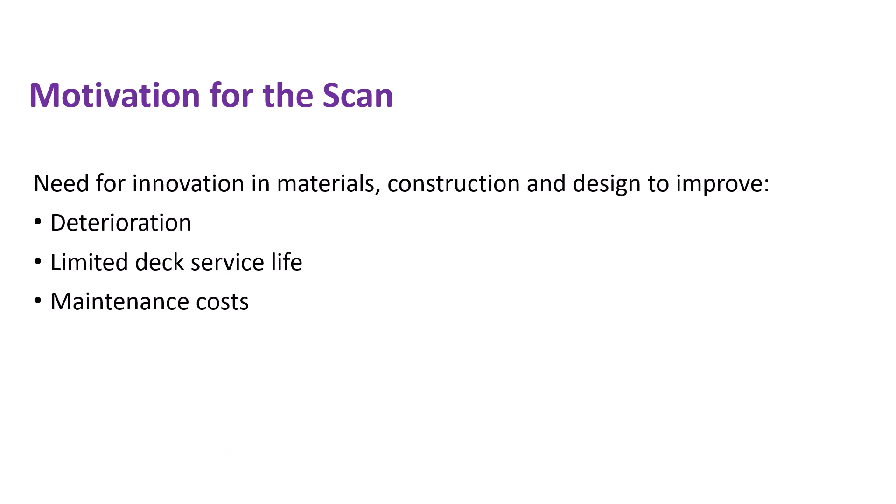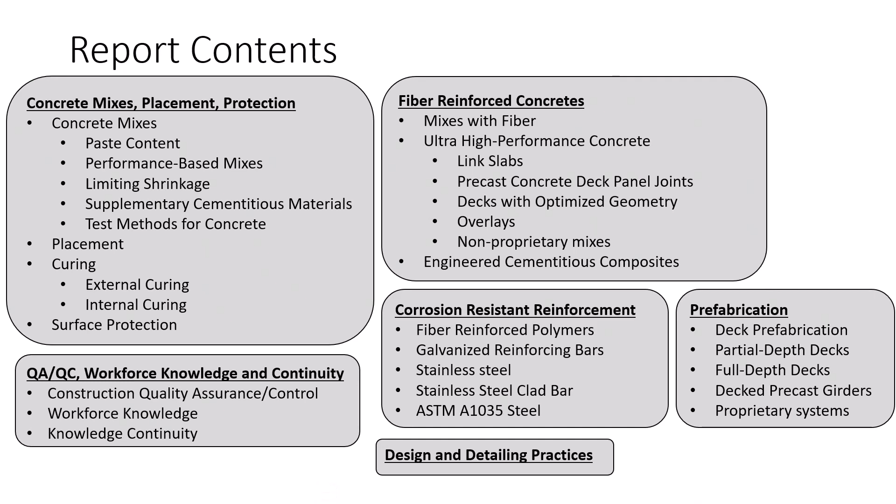This is the contents of what will be included in the report. They discuss a variety of things that range from different concrete mixes, placement, construction practices, to fiber reinforced concrete, to corrosion resistance reinforcement, prefabrication, QA, QC, and design. The report should be available very soon, and there will be lots more information in it, but the following will be just an overview of what was discussed and found out.

So we'll start with concrete mixes, placement, and protection. The scan was focused on innovation, but this part is more about best practices and modern concrete mixes. Not too much innovation in terms of materials, but what works best for agencies that participated in the scan.

So first thing that was discussed was what makes concrete mix crack less. It was discovered that for those modern mixes that have fewer cracks, the paste content was limited. If you limit that paste content, which would be our water and cement content, it does seem to result in fewer cracks, which does mean moderate strength, but the consensus was that we don't really need terribly high strength for concrete decks.

Anyways, there were some concerns though from some DOTs that you don't always get what you specify, so it's good to shoot a little higher just in case there are some material quality issues. So some states, because of that, still want to specify higher strength, but others are comfortable with a moderate strength, and they did experience less cracking with that lower cementitious material content. Here are three examples from the scan with their cementitious material content.

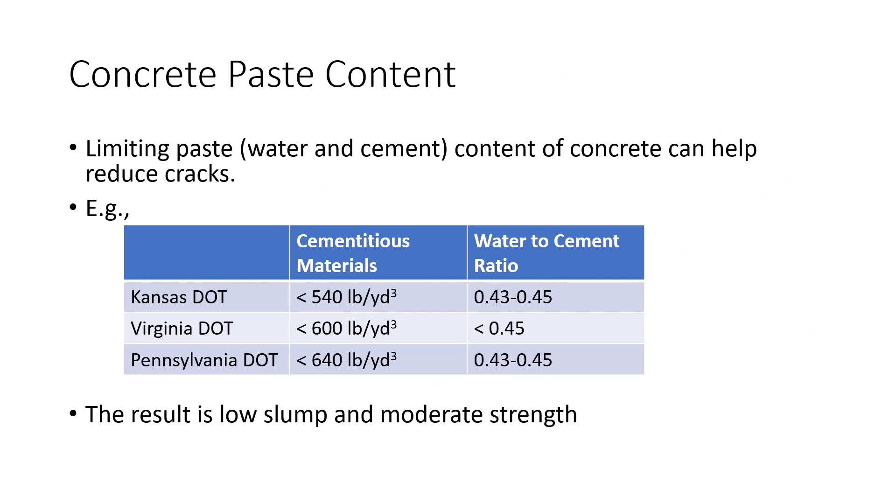The second thing discussed for concrete mix is that limiting concrete shrinkage strain seems to have a big impact. There's really a common performance requirement seen when agencies have these high performance mixes. This can be achieved either with the mix or with shrinkage reducing admixtures. California is a big fan of this, and they reported really great benefits from adding shrinkage reducing admixtures without really seeing an increase in cost all that much.

So from a few participating states, their shrinkage strain limit at 28 days is right around 300 to 350 microstrain. How they achieve that is kind of up to them. For example, Virginia DOT uses shrinkage reducing admixtures, but it's an optional thing. So if you can achieve that shrinkage strain without admixtures, then that's okay too.

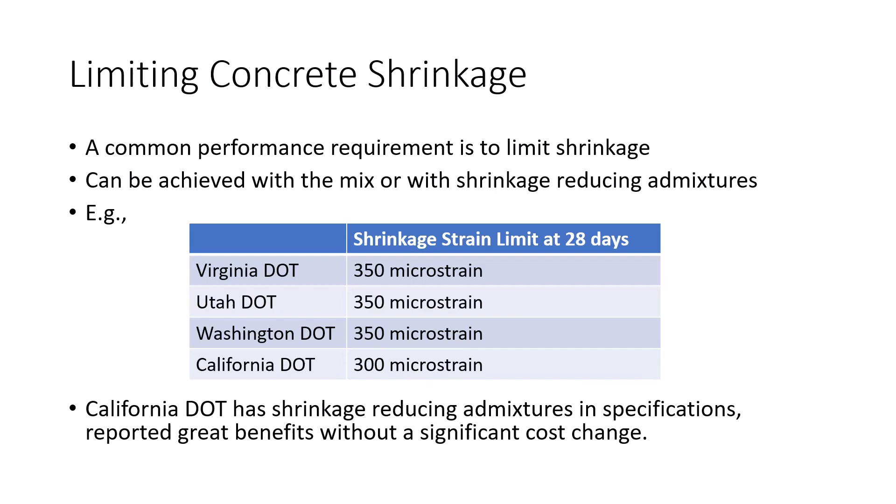The scan also discussed placement and finishing. It's not really innovation, but most DOTs agreed that you get the best quality concrete when you minimize finishing.

A big thing is to start external curing or wet curing right away. Some DOTs even discussed bringing work bridges to the site so workers can start curing right away, avoiding tining and instead saw-grooving the hardened concrete so external curing can start sooner. Some DOTs mentioned monetary penalties per hour of delay in external curing to encourage contractors to start curing right away, and using misting if you can to help control evaporation of the concrete.

There was also discussion about specifying temperature limits for plastic concrete, trying to pour when ambient temperature fluctuations are small, or when the concrete and contact surface temperatures - meaning the girders - are close together. If the temperature of the concrete and the girders were very different at the time of the pour, it seemed to cause more trouble. For the same reason, avoiding night pours. Controlling that temperature as much as you can seemed to result in better quality concrete.

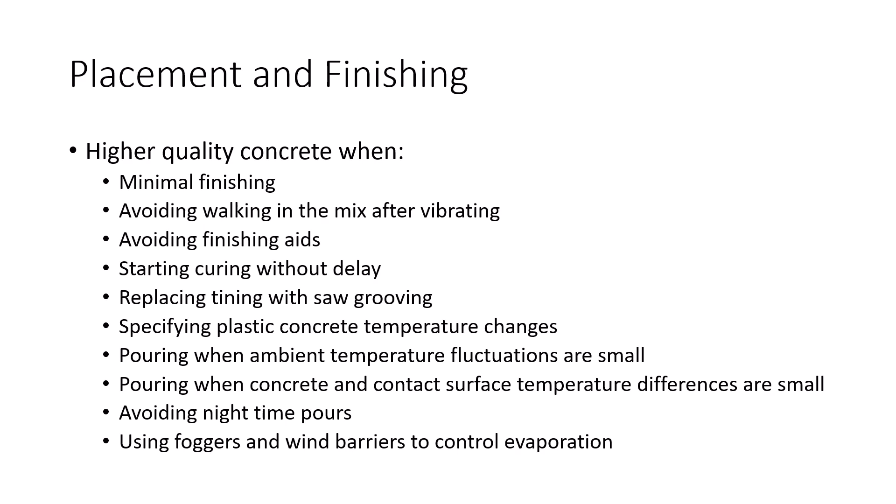For external curing, the key is to start right away, but there's also a new innovative way of curing concrete called internal curing. Essentially, you replace a fraction of your aggregate with a pre-wetted lightweight aggregate. The water in that aggregate is released over time to help hydration, so instead of just hydrating the surface of the concrete, you're essentially hydrating it from the inside out, internally.

They spent a lot of time on this during the workshop, and for some states like New York and Virginia, this is pretty much standard practice. They do this on all their concrete decks and have seen great results. But other states have had mixed results with this.

They concluded that the states with good results must have good quality lightweight aggregates, confidence in the moisture content of the aggregates, and suppliers who know how to store them. Versus if you have mixed results, you either don't have lightweight aggregate at all, or you're not sure about the quality of the aggregate, or the contractors are inexperienced with it.

This is a method that does require a good amount of owner involvement just to get it set up right. So if there's insufficient owner oversight to get this method working, that's when the mixed results come in.

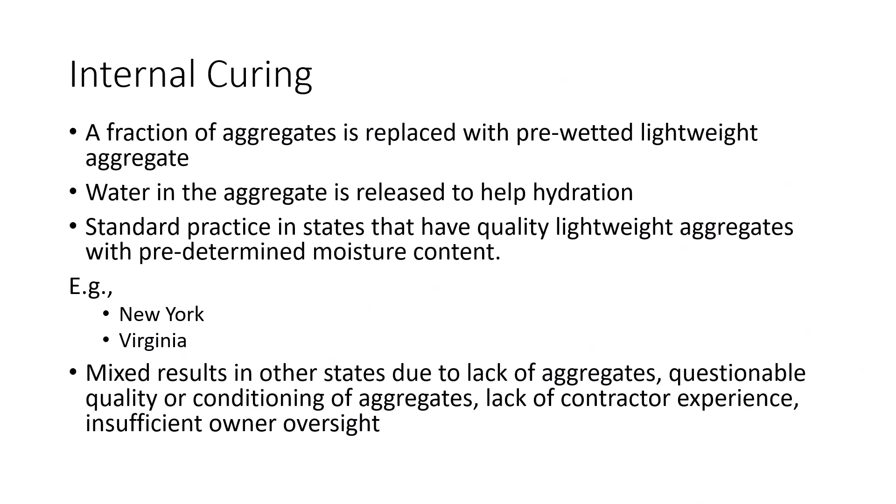That's really all there was to talk about when it came to concrete mixes. The next thing that was discussed was adding fibers to concrete.

Some agencies do this to have an additional measure to protect against any issues with the quality of the materials they get, or construction quality. Construction quality is important to make concrete crack less, so to protect against unexpected or undesired events, it may be good to add fibers into your concrete.

In California and Minnesota, this is standard practice for them to have fibers in their deck mixes. But one thing that's important to emphasize is that if you just add fibers into your mix and think that it's going to work, that's probably too naive of an approach. The types of fibers, the various suppliers, the size of fibers, orientation, and distribution all have a great impact on the results, and of course, adding fibers also changes the workability of the mix.

So just like any innovation, doing some iterations and improving that mix over time is what's needed here. One recommendation that came out of the scan is that we do need some testing methods and acceptance criteria to approve different fibers and suppliers. I know Minnesota has an approved list of suppliers for these fibers, but not everybody does, so some national acceptance criteria and tests are needed.

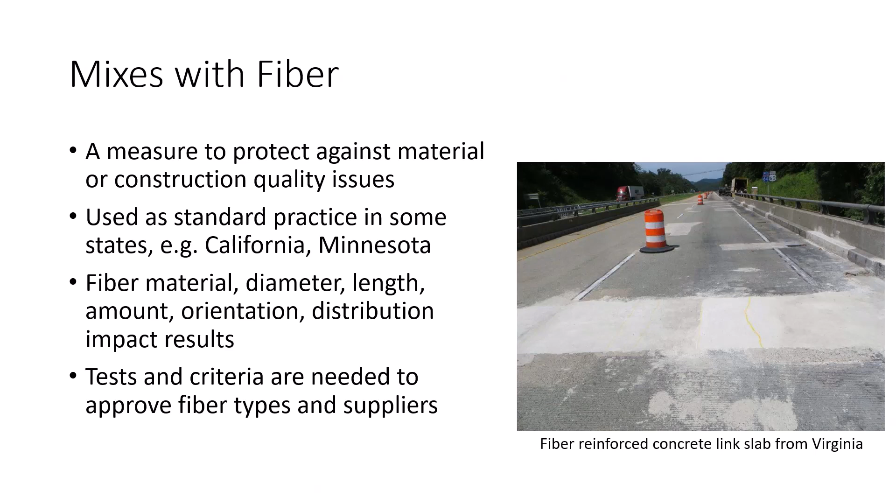The next thing was ultra-high performance concrete, or UHPC. You've probably all heard of this as it's such a popular topic right now. It's a type of fiber reinforced concrete, with the fibers typically being high-strength steel fibers. UHPC usually has a certain performance objective, and that objective is very high compressive strength, something like 22 KSI is possible, which again is not very critical for decks to achieve, but it has that very high packing density and low permeability, which makes it very durable and attractive for deck applications.

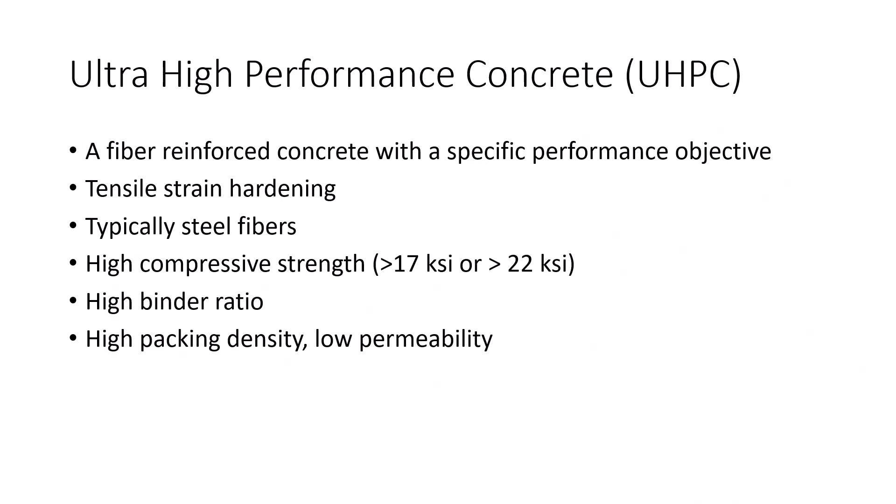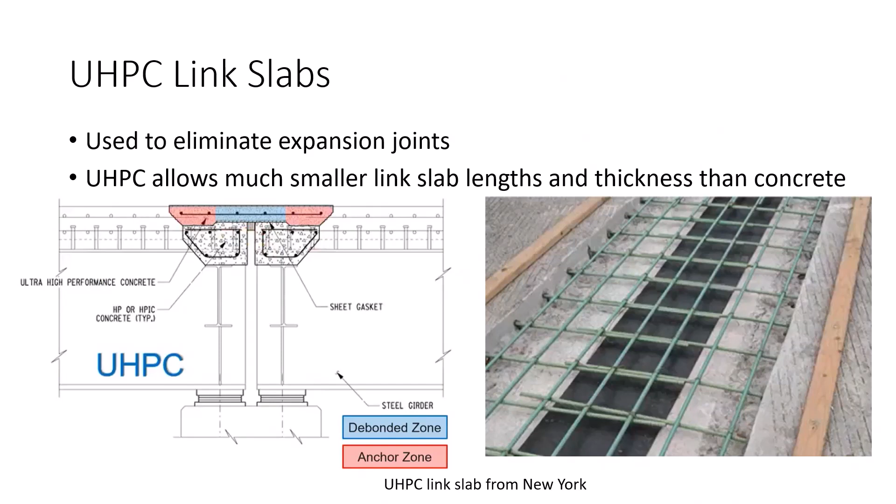So a few applications were discussed, one example being link slabs, that piece of deck that goes over the supports or connects to girder ends. Link slabs were used with conventional concrete as well, but they tended to be much wider. New York has started replacing some bridge deck expansion joints with these link slabs and reported great results. When you switch to UHPC, the link slab can be much shorter, just a couple of feet wide, and thinner. This completely eliminates the expansion joint and gets a much more durable deck.

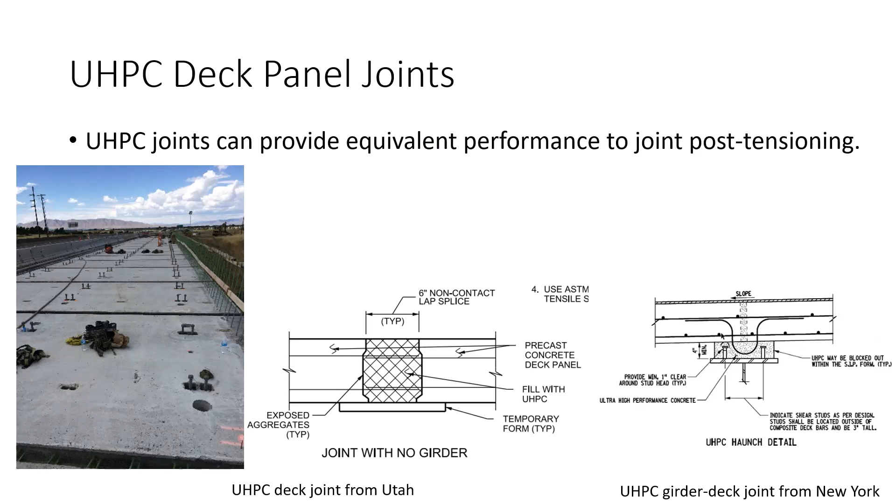The second example of UHPC application is in deck panel joints between precast concrete deck panels. UHPC is much more expensive than conventional concrete, so most applications you see will be small volume. You can use UHPC for precast concrete panels, either between the panels or between the panel and the girders.

Some key points for making UHPC work, not just for these two applications but for any application of UHPC. One important thing is to really seal the forms against leakage, because UHPC is much more flowable than normal concrete. That's why on the right side there is a top cover for the form. The material also tends to settle a little when it hardens, so you have to fill the joints a bit more to account for that settlement. That's why you see that bucket there, maintaining hydraulic pressure over the joint. If you have a little extra, you can just grind it off later.

If you're pouring UHPC at point A and expect it to flow to point B, and those two points are very far apart, then the fibers can all orient in the same direction of the flow, which is undesirable since we want a random distribution of fibers. So keeping that flow length short is recommended.

And then just like any application with connections, roughening that concrete surface is very important, bringing panel joints or whatever joint it is to a saturated surface dry condition before placing UHPC. That really makes a difference.

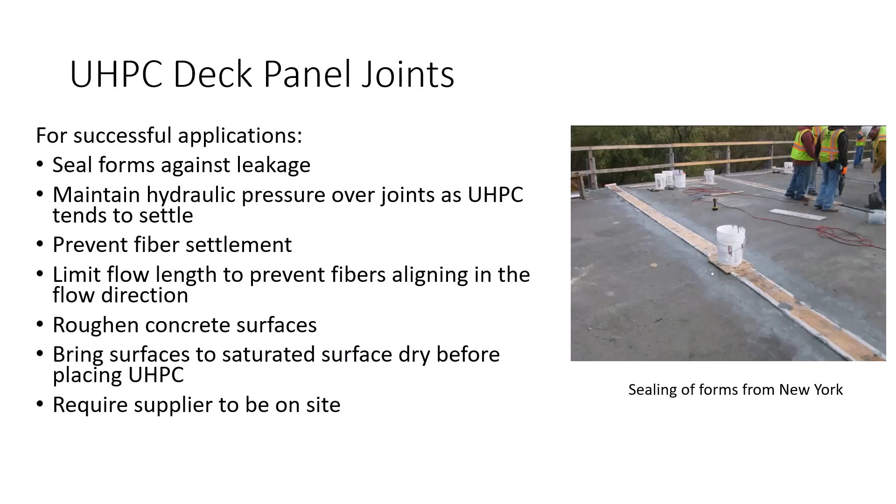Some DOTs reported that they require the supplier of UHPC to be on site to help with these things. If it's a proprietary product, one reason that material is so expensive is that it comes with support. So especially if the contractor is not very experienced, it may be a good idea to have that requirement in your contract.

Finally for UHPC, proprietary mixes can be very costly, although now there are multiple vendors and suppliers, and that cost is expected to go down. Many states or universities are now developing their own non-proprietary mixes. There are three examples here for Iowa, Michigan, and Texas, since they participated in the workshop scan, but there are many others being developed across the country.

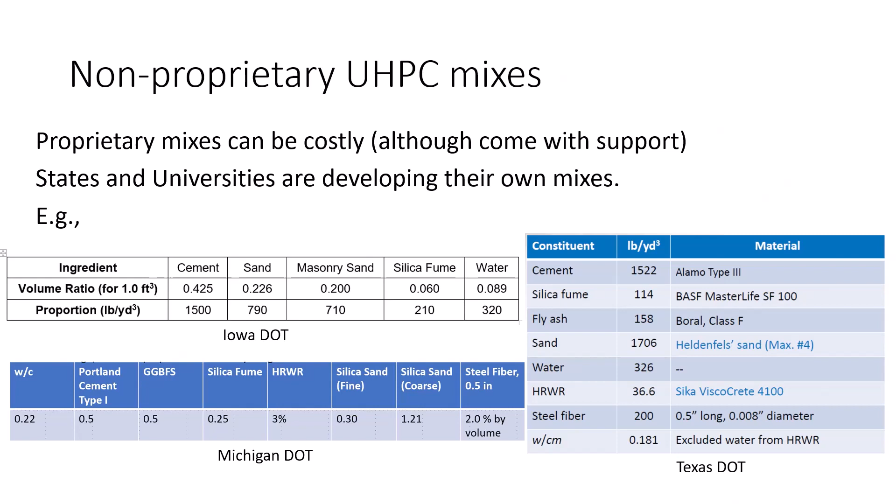Next up is corrosion-resistant reinforcement. We just discussed controlling cracking with the concrete mix itself. If you can come up with a modern mix with low shrinkage, low paste content, and high construction quality, that's really the best option and should be prioritized first. Corrosion-resistant reinforcement should come next, taking a service life approach to the higher initial cost. Do we need 100 years of deck service life, or can we just replace a deck? Then maybe corrosion-resistant reinforcement might not be needed for that deck.

Starting with FRP rebar, fiber reinforced polymer or fiber reinforced plastic rebar, there are different kinds: glass, carbon, and aramid. Glass tends to be the most common because it's cheaper, so most of this discussion focused on glass FRP rebar. We heard a lot from the Florida DOT, as they have used FRP rebar since the 80s and have a great website dedicated to their FRP research. Although most of their use is for substructure units, that's because in Florida their corrosion comes from salt water, not de-icing salts.

The differences between FRP rebar and metallic reinforcement is that it doesn't corrode because it's not metallic, and it's very lightweight, so it's easy for construction workers to pick up and move. You can technically get a smaller reinforcement cover because it doesn't corrode. But there was some discussion about how the FRP grid may float during concrete pours if you don't secure it well in place, so some DOTs were worried about that floating issue and still went with the larger cover. These bars do not yield, so essentially they're elastic and then they fracture.

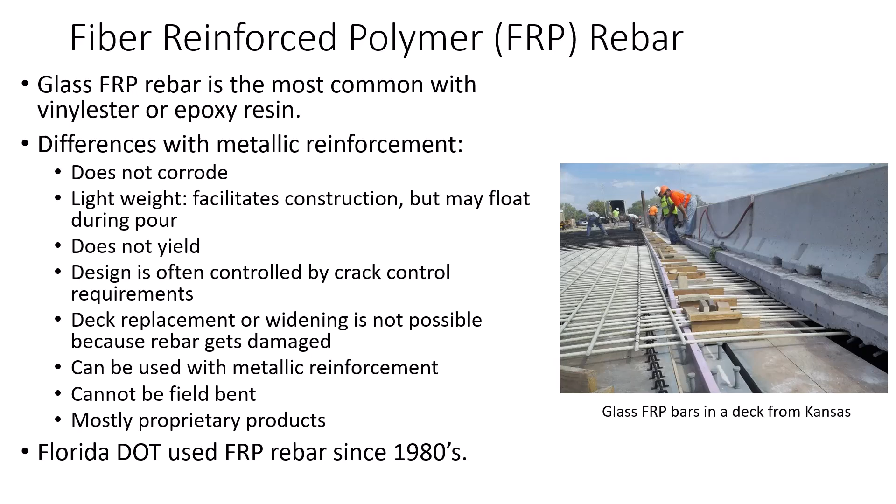FRP bars cannot be field bent, they come pre-bent, so that's just something to keep in mind. Most FRP products are proprietary, which has an advantage, meaning the companies are constantly improving their products. So the FRP rebar you used 10 to 15 years ago is not the same FRP rebar we have today. The recommendation from the scan was to invest some funds to research these newer and hopefully better products for both short-term and long-term performance.

There was some discussion about stainless steel rebar, and the conclusion was it's an alloy, so not all stainless steel is the same. The performance will depend on the type of stainless steel rebar. We learned from Virginia DOT that they have X-ray fluorescence handheld devices that can tell you the composition of the alloy, which they use to verify that what you specified is what you actually received from the manufacturer. So this is a quick way to check that the alloy meets your specification.

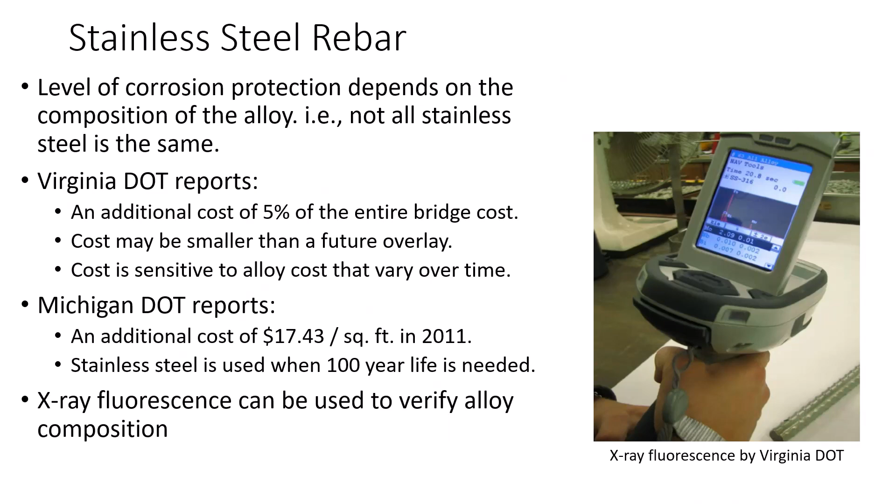Virginia and Michigan DOT reported the cost of stainless steel. Virginia reported about a 5% additional total cost if they use stainless steel in their deck, and their justification is that this cost may be smaller than a future overlay. Michigan DOT reported about a $17 per square foot increase in cost back in 2011.

Then we have the ASTM A1035 bars, which you may know by their brand names, MMFX or ChromX. These are chromium alloy bars, and we have three different types, CS, CM, and CL, with CS providing the highest corrosion resistance, and so of course that comes with the highest price. They come in either 100 KSI or 120 KSI yield strength. Most agencies that participated in the scan reported that they chose not to rely on that high strength, so they just use it as a one-to-one replacement for our good old grade 60 steel, or you can cap the yield strength in the design to be conservative.

There isn't all that much data for the long-term performance of these bars, so most states use the CS type because that is supposed to provide the most corrosion resistance. The cost is a little bit higher. Michigan DOT numbers reported from 2021 are $2 to $3 a pound versus $1 to $2 a pound for epoxy coated bars.

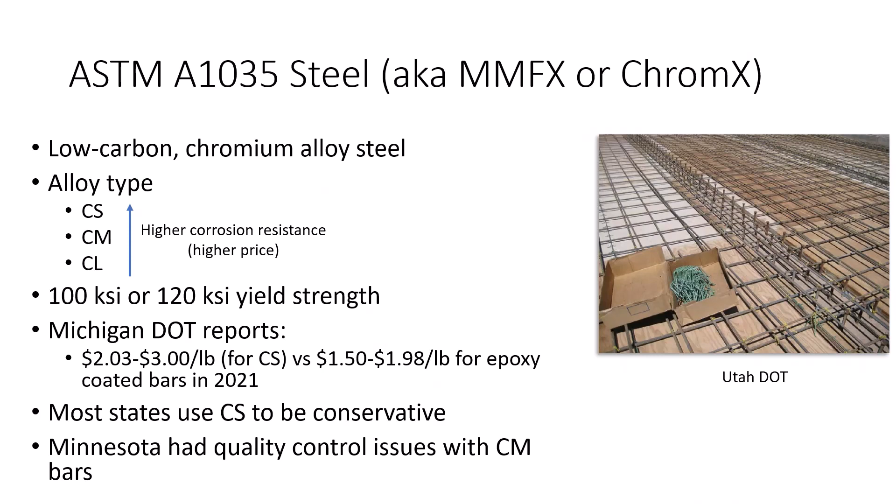Next up is prefabrication of decks, and due to time I really won't go into much here, but the report will address all of these items.

So I just picked one to go through today, and that is partial depth precast deck panels. These are essentially like stay-in-place forms and are about half the deck thickness. We heard quite a bit from Texas DOT because apparently 90% of their bridge decks are built this way, so standard practice is to use stay-in-place or partial depth precast deck panels for their deck construction. Other states in the scan have used this, but not everybody has had a great experience, reporting reflective cracking when they use deck panels.

When they use these panels, Texas told us about two important things regarding their key to success.

The first is that they have these bedding strips, these black rectangles of a particular size. The reason why it's there is because they want to make sure that the cast-in-place concrete gets under that precast deck panel and is well consolidated underneath, becoming a good permanent support for that deck panel.

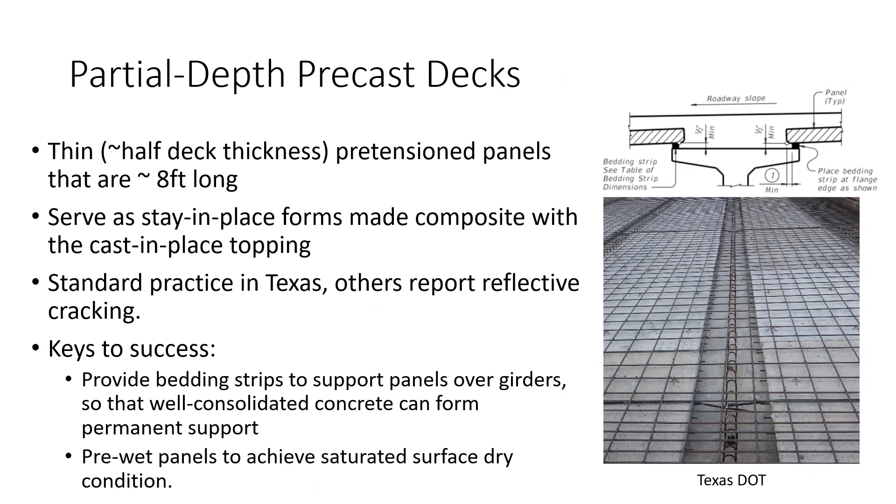The second key point, just like you heard me mention for UHPC, is to bring those panels to that saturated surface dry condition by pre-wetting them, and then you get that great bond between the two.

All right, coming towards an end, next we'll discuss how design and detailing practices may improve our deck performance. There's quite a bit of variation in design and detailing practices among states, and even within a state these practices vary over time.

Something important to note is that because these things change over time and from state to state, it's really critical to document the implication of these changes. Keep track of your innovation. If you're changing something in design, was it successful? Did it do a good job, both short term and hopefully long term?

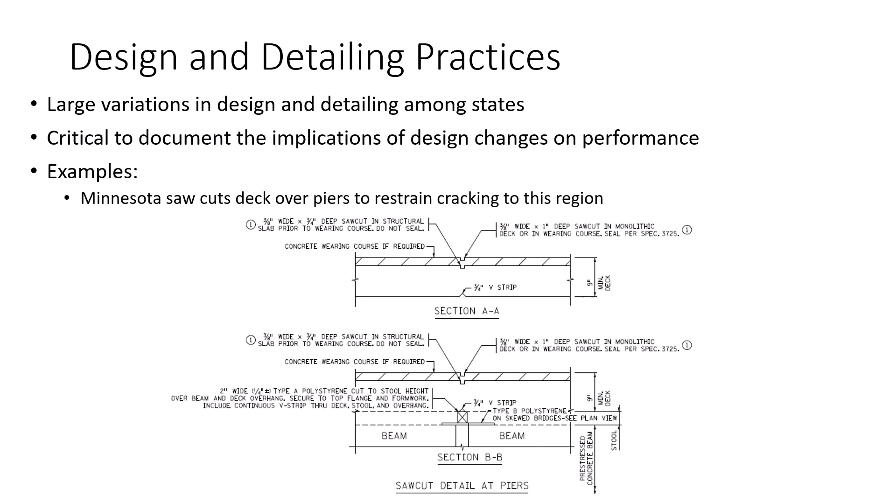Texas DOT talked about how they reduce the amount of reinforcement in the decks as a method of reducing cracking. That may sound counterintuitive, but their reasoning is that with a smaller reinforcing amount, the corrosion product that builds over time will be small, creating less pressure when it expands and resulting in less cracking.

The other change they made is that at the very top layer of rebar, the layer closest to the top surface is the longitudinal rebar. The reason for that is because their prevalent cracking was in the transverse direction, so the longitudinal rebars restrained those cracks better.

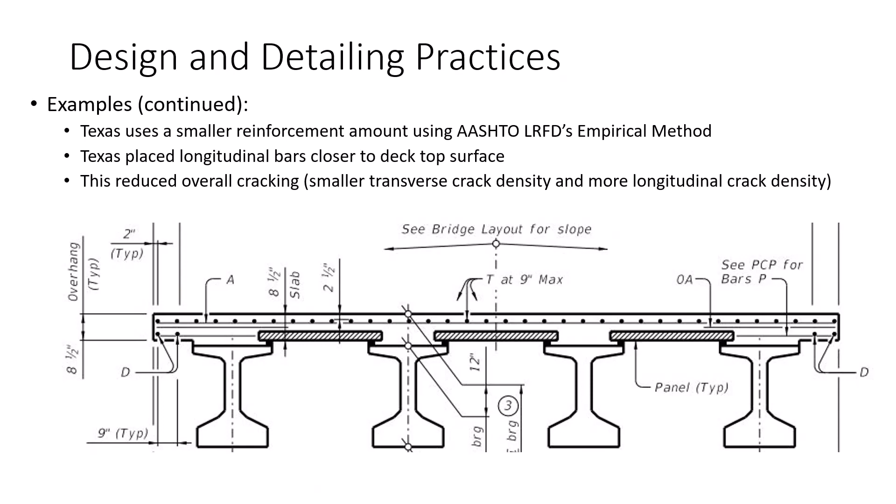They did help reduce overall cracking. They got much smaller transverse cracking but more longitudinal cracking. Overall, they did see a reduction in cracking, and they're happy with these changes.

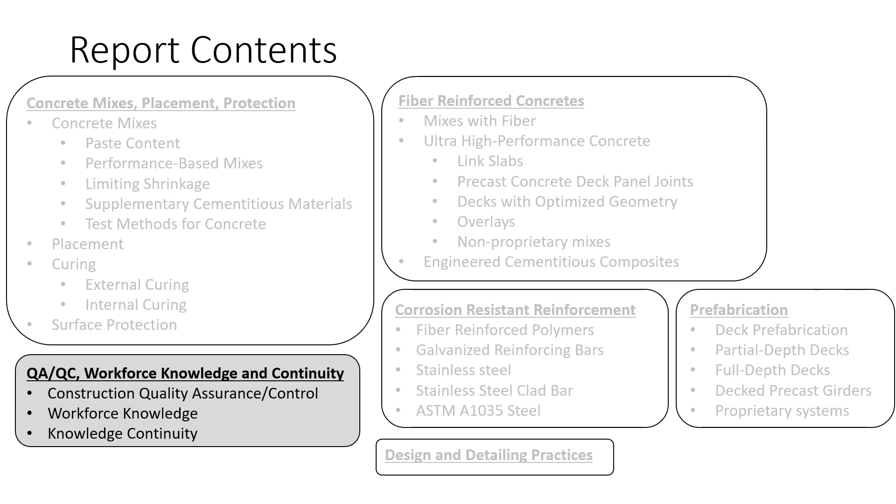Then the last part, quickly, we talked about quality control, quality assurance, and different practices for making sure that workforce knowledge is there and continues to be there. In terms of construction quality practices, I think everybody can agree that especially if you're using an innovative product, something new, you have to be really well prepared for it.

For example, Washington uses these test pours for a new mix. It could be on-site or off-site, but if the contractor does a test pour, then they know what to expect with the workability of that mix.

Encouraging pre-deck pour meetings and construction checklists, and of course training people—we talked quite a bit about that during the workshop. Some DOTs provided training programs both for internal and external staff inspectors and have certification programs as well.

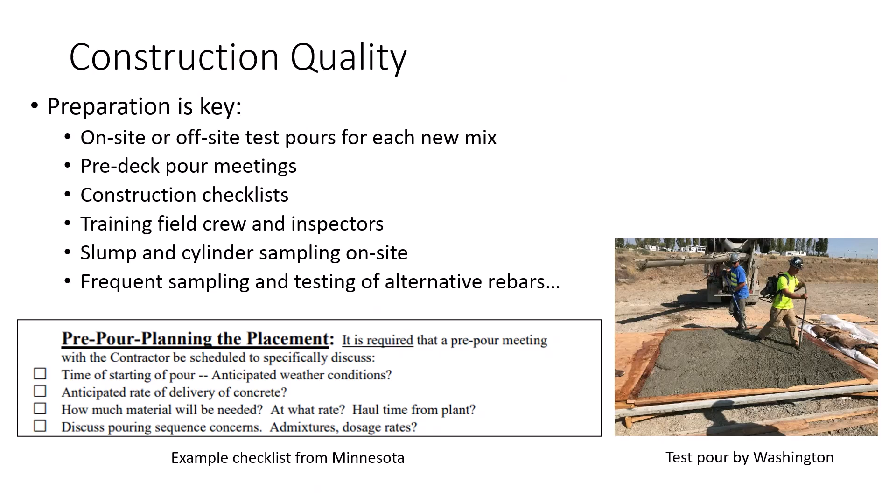In terms of knowledge continuity, what do you do when people have that knowledge now, but when workforce changes with people retiring, how do you make sure that knowledge stays in the agency?

One thing we know is that innovation doesn't just happen over time—it requires iteration. So if there's a champion of that innovation in the agency and they disappear, that innovation shouldn't just stop there. Keep good track of these innovation projects. How are they doing now? But also how are they doing over the long term, as that impacts decisions in the future.

Utah has created an innovation-specific database or inventory for their bridges. Florida has maintained a great website with research information, research reports, and demonstration projects. All these things help keep track of these innovations and how they're performing.

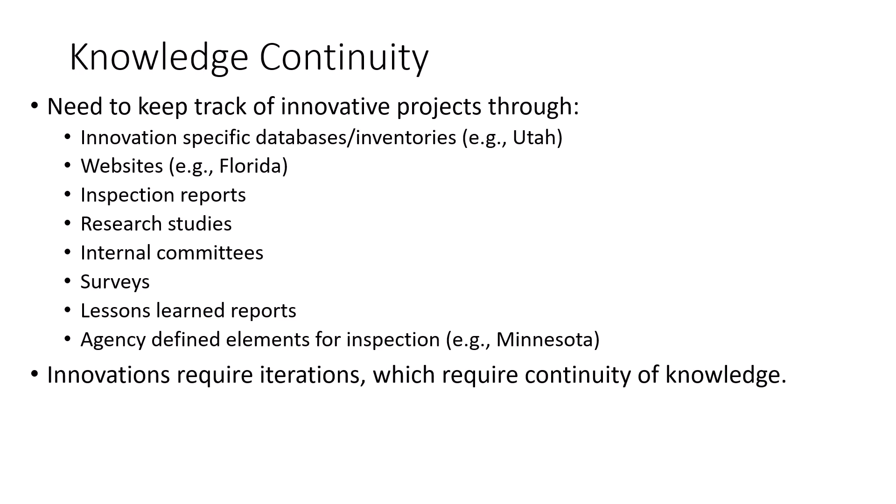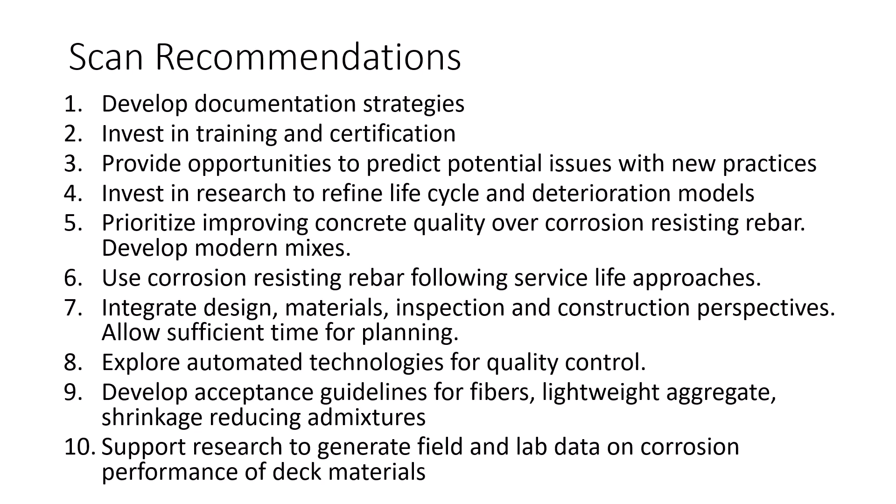So just to wrap it up, these are the 10 recommendations from the scan: documenting innovation, training certification, being prepared, investing in research for life cycle deterioration models, developing modern mixes. That report should be available very soon and will provide much more detail into the scan recommendations.